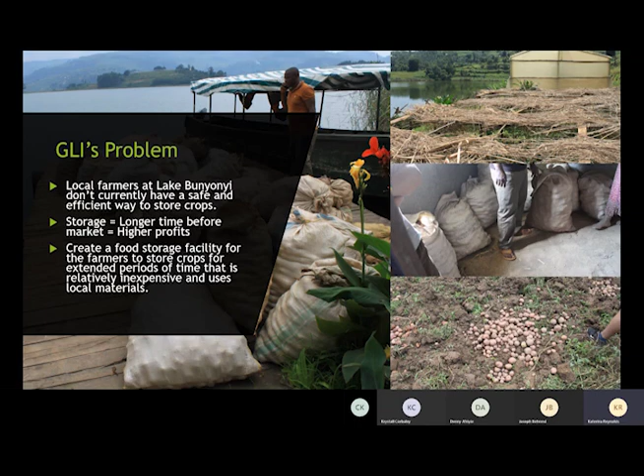So we were tasked with creating this food storage facility for the farmers to store these crops for extended periods of time that is relatively inexpensive and uses local materials and local labor. So this goes into our requirements, which is that we had to determine a certain storage capacity for the potatoes that we assumed would be stored. And this value would increase year by year due to the farmer increase.

Then it would only use locally sourced materials due to the cost, as well as making the food storage facility cost effective for any farmer to build on their own. The building of the facility itself would include local labor, whether that's the farmers or local construction, and it would have some sort of environmental control to allow for the produce to have a longer shelf life. Finally, it would have some low to no energy lighting for the farmers to see where their crops are being stored.

Earlier this year, we had the opportunity to visit Uganda to interact with the farmers and the customer to really understand the problem at hand. Before we got there, we had a design in mind, and after interacting with the farmers, the biggest change that we made first was the location. Initially, we thought the model farm was going to be on the resort. But after interacting with the farmers, we realized that we really needed to change the location to the model farm where the farmers can go there at any time and really pick which technology or design they would like to implement on their farm.

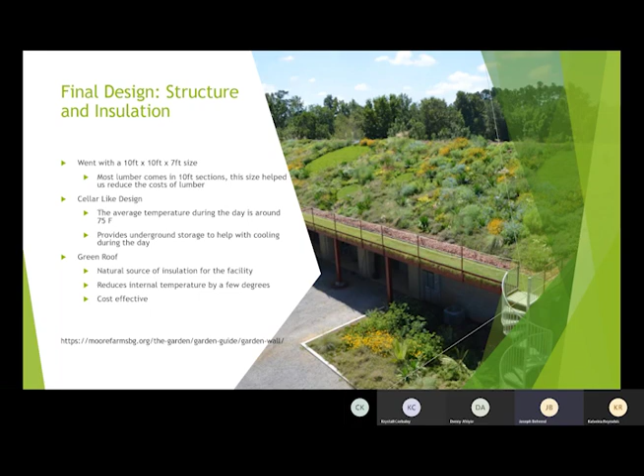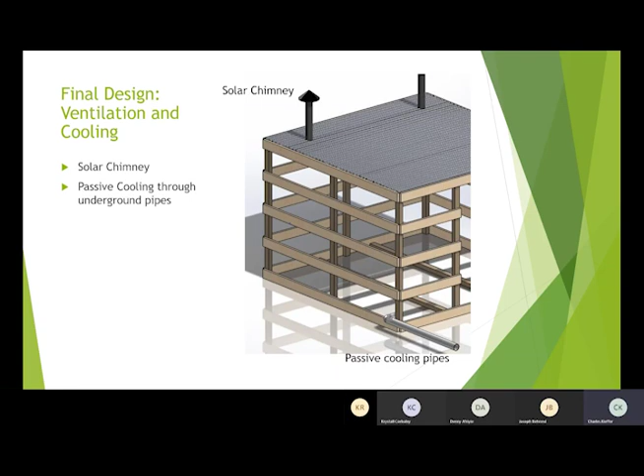For our senior design project, we were tasked to design this crop storage facility, so we did not have an actual product. So to prove that our design worked, we did various calculations to ensure that it was structurally sound and that all concepts achieved our engineering requirements. Solar chimney calculations were done to ensure that the solar chimneys that would be installed would be large enough to ventilate all the air out of the storage facility in an adequate time.

Beam load calculations were done on the roof of the storage facility to ensure that additional weight from rain or even a person standing on the green roof would not break the storage facility. Surcharge loads were performed to determine whether the wood could withstand the surcharge loads from the soil in the area and whether land shifts would apply too great of loads onto the structure.

And then we investigated various anchoring situations with cellar designs, and we determined that it was not necessary to anchor our design.

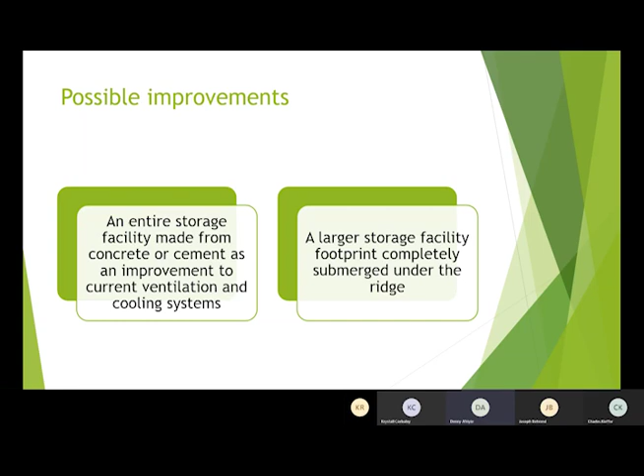Also, currently, we designed the facility to accommodate a prediction of how much the farmers can harvest in the next couple of years. We see an opportunity for enlarging the current footprint of the storage facility underground, since there's a lot of space, and this will allow the farmers to store even more crops.

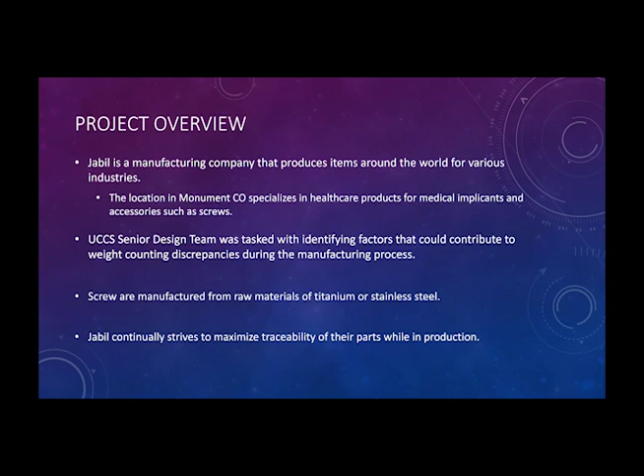The project is for Jabil, which is a manufacturing company around the world. Specifically, this location is in Monument, Colorado, which specializes in medical screws. Our job was to identify factors that could be contributing to weight counting discrepancies. When screws are manufactured, they are then weighed on scales, and the scales produce a count, which enables Jabil to determine the amount of screws in a specific lot size.

As these screws come off the machine, they are weighed at various steps throughout the process. Occasionally, the count will be off from a previous step, requiring a 100% verification process. This process is extremely time consuming and costly. A lot of times it ends up in scrapping the entire lot, when they have lots with 50 to 1,000 screws and the price of a screw varying with roughly an average of $50 a screw, it can be extremely costly.

Through initial investigations, we toured the site multiple times. We also conducted interviews with both stakeholders and various employees on the floor, and we noticed a couple of different things. The first one being that the scale setup and the stand configurations varied at each weight station. So even though a screw went through multiple stations, it saw various scales and various configurations.

The other thing that we noticed was that the process itself is left to operators' discretion and varies between operators. With those factors and others observed, we decided that an eight-factor DOE would be the best way to explore the weight counting discrepancies that we saw in the facility.

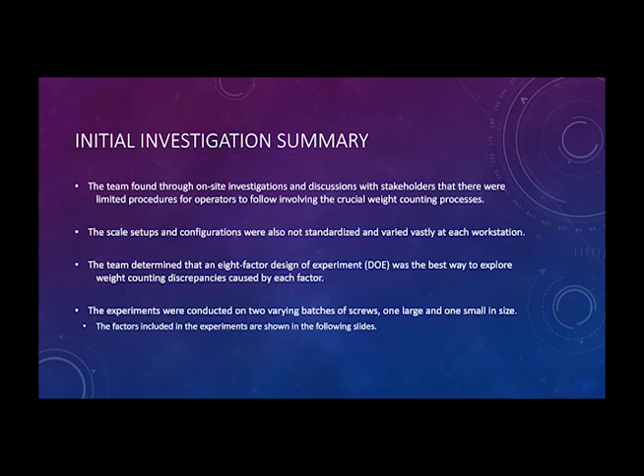The first two that we want to talk about are the scale capacity and the initial count setup. So initially, we noticed that there were 12 kilogram, 5 kilogram, and 2 kilogram scales located throughout the facility. We decided for this specific project to only focus on the 12 and 5 kilogram scales, because the 2 kilogram scales were mainly only located over in the shipping area and weren't used on the floor. We also decided to look at the initial count setup. So some operators initially put 10 parts on the scale when establishing the count, whereas other operators put 25.

The third factor the team decided to investigate was part condition. The team noticed through their on-site investigations that as the screws come off of the machines, they have oil and burrs, and the team determined that this must add to the weight discrepancies seen by the final results on the scales. So the team will examine the magnitude of error produced from the oil and burrs remaining on each part.

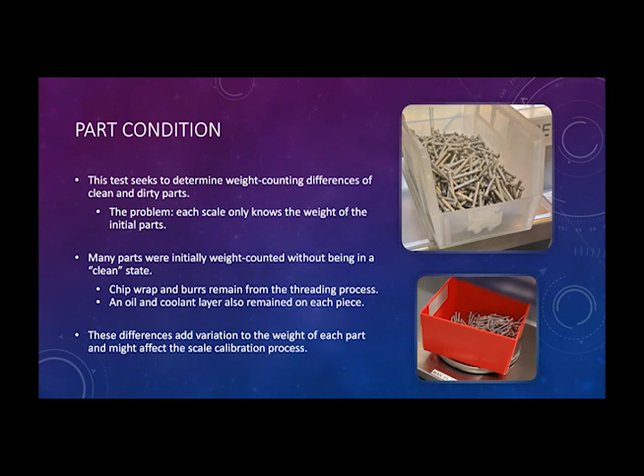Another factor investigated was scale configuration. As the team witnessed multiple weight counts being performed, they noticed that some of the scales were out of tolerance, meaning they were unbalanced. The team recognized that this could potentially cause weight counting discrepancies seen on a day-to-day basis, so they decided to include this factor in their DOE to see the magnitude of error produced from scale tolerances.

Enclosure and stand type were two more factors that affected the weight count. As the team walked through the Jabil plant, we found different enclosures. In some cases, there was no enclosure. In other cases, there was half a door, and in one instance, there was a cloth. We determined that airflow would affect the weight count as the plant has multiple fans that produce airflow, especially during the summer.

The team noticed that the deburring machine produced a large number of vibrations right next to one of the scales being used, which could affect the weight count due to the scale sensitivity. A number of stands had isolation blocks attached, while some stands had wheels attached and a few only had a piece of cardboard attached to the bottom, which we figured would affect the weight count as only the isolation blocks reduce the impact of vibrations. We estimated early on that a full door with hinges would reduce the effects of airflow the most.

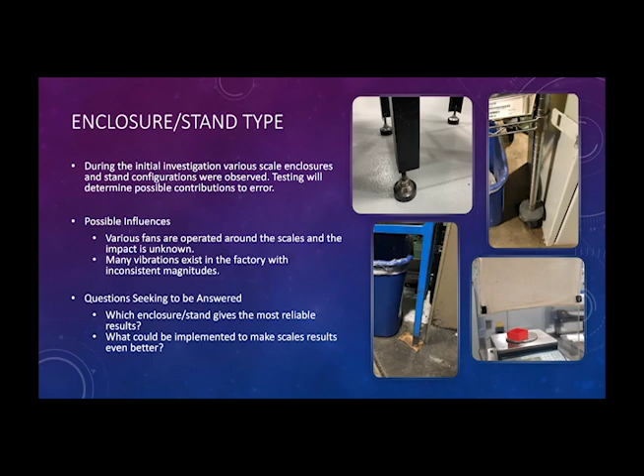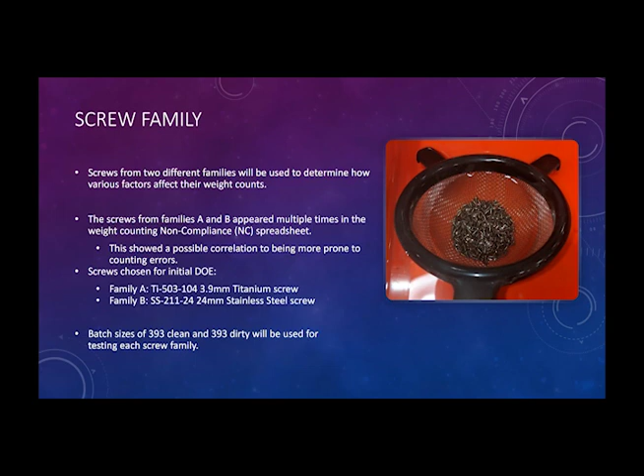The team received an NC report from Jabil detailing exactly which screws were resulting in a weight counting error, and we found that the following screws appeared a number of times. From family A, the titanium 503104 3.9 millimeter screw. From family B, the 21124 24 millimeter stainless steel screw. Batch sizes of 393 screws statistically covered the range of screws which are counted at Jabil.

In order to test the impact that the previous 8 factors had on the weight counting accuracy at Jabil, an online software called Minitab was utilized to create a design of experiments, commonly referred to as a DOE. And through this DOE, we were able to test those factors and determine any correlations between the factors or any individual impacts that those factors had on the accuracy of weight counting.

From those results, we were able to obtain a couple very valuable results. The first one was that screw cleanliness, which was our factor D, was by far the largest factor contributing to error in final count.

This was a result of the small screws not being able to be accurately counted when coated in oil. This was also seen in regards to the large screws as well. The second result that we were able to determine was the initial count size, which we had called factor E. This had little to no correlation to count accuracy, which was very interesting and unique and went against what we originally hypothesized. It was determined that when performing the tests, the initial count size, whether it be 10 or 25 screws, both yielded similar results.

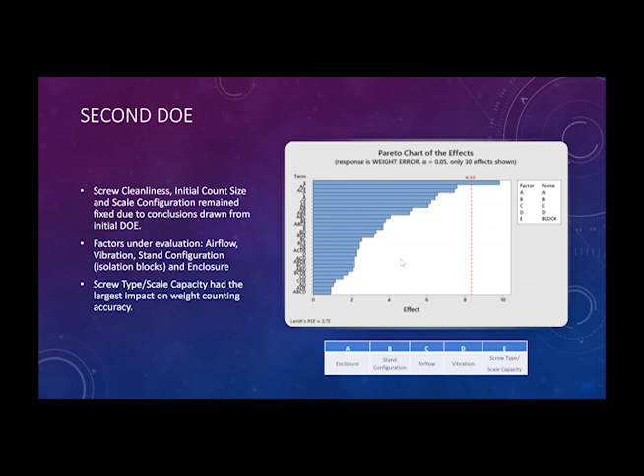So airflow, vibration, stand configuration, and enclosure were tested. From this testing, it was determined that screw type and scale capacity actually had the largest impact on weight counting accuracy. This just shows that we needed to test the screws on the appropriate scale. In order to also see more in depth some of the other effects that the factors had, the small and large sections of the DOE were broken out and analyzed independently. The most conclusions were able to be drawn from the small DOE, which the results are shown on the right half side of the screen.

It shows that airflow and enclosure, factor C and factor A respectively, had the largest impact on the accuracy of the weight counts for the small screws. When the screws were being tested and the airflow was placed directly on the scale, it experienced both high and low counts. As seen in the table, counts were experienced of 19 less than the actual number of screws in the lot, and 58 more than the actual count in the lot. This was due to the airflow and enclosure, as you can see in row 1 and the final row. In the enclosure, there was no door and high airflow in both the last row and the first row, which were both the highest difference away from the actual weight count that we were shooting for.

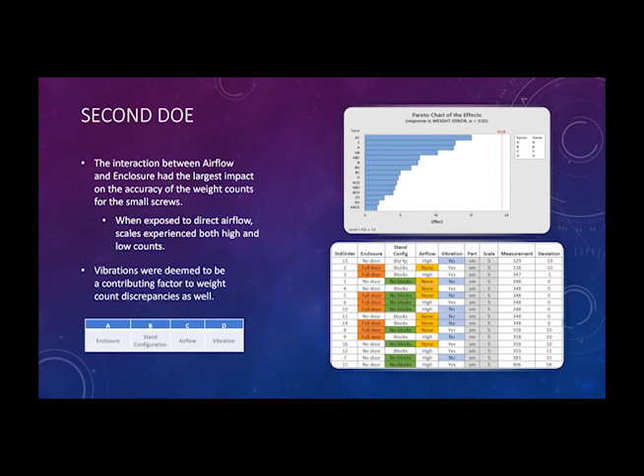It also was a result of vibrations, which you can see in the final row where there were no isolation blocks and high vibrations, which resulted in 58 extra screws being counted than what were actually supposed to be there. The biggest takeaway in our studies was the lack of a standard operating process through Jabil's weight counting procedure. A standard operating procedure needed to be in place, tailored to the screws being weighed. Smaller screws should be weighed clean with a low capacity, high resolution scale, and larger screws should be weighed clean with high capacity, low resolution scales.

Operator miscounts should be considered, and action should be taken to mitigate these. Some physical solutions could potentially be a trough that helps easily preload 10 screws for the initial count. Isolation blocks and full enclosures should be implemented on all weight stations to minimize the effects of airflow and vibration. And scales should be confirmed to be in tolerance before counting, as opposed to the 6-month calibrations that are currently performed.

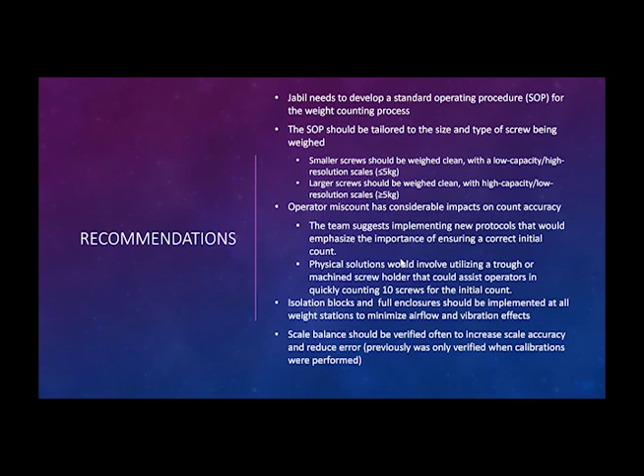My name is Kelly Castrita, and I'll introduce the sponsor as well as present some background information about our senior design project, LIU Steering Box. Linköping University, also known as LIU, reached out to UCCS as a sponsor for the project for the LIU Formula Student Team. The LIU team is made up of several members who work on various tasks to include electronics, vehicle dynamics, HR, and business engineering.

SAE not only hosts the various competitions previously mentioned, but they set the regulations for each division to ensure a fair competition. While these competitions are held around the globe, the LIU team can only participate in those around Europe. The primary focus and design for the Formula Division is to maximize downforce on the vehicle while being as lightweight as possible. This emphasis on being lightweight will feed into the problem presented. The next speaker of the presentation, Riley, will discuss this problem.

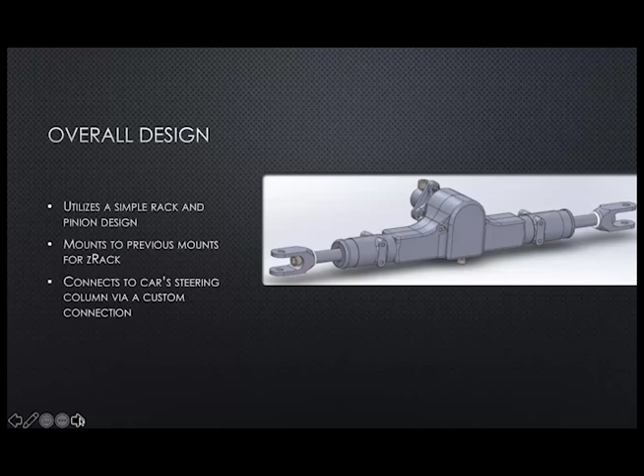Hi, my name is Kyle Jocelyn, and I'm going to be talking about the connection design. The main focus of this project was to design a new connection between the steering box and the steering wheel. It had to be quick and easy to separate from the chassis without cutting or breaking anything. 4 designs were evaluated. They were all compared based on weight, strength, longevity, cost, and manufacturability.

Each half of the connection has a face that aligns with the face on the other half. They are connected together using 3 bolts and 3 nylock nuts. We will be delivering LIU 2 different options for the half that connects to the steering column. They can choose whichever one they would prefer to use more. The first option is steel. This part can be welded to their steering column, which is their preferred connection method.

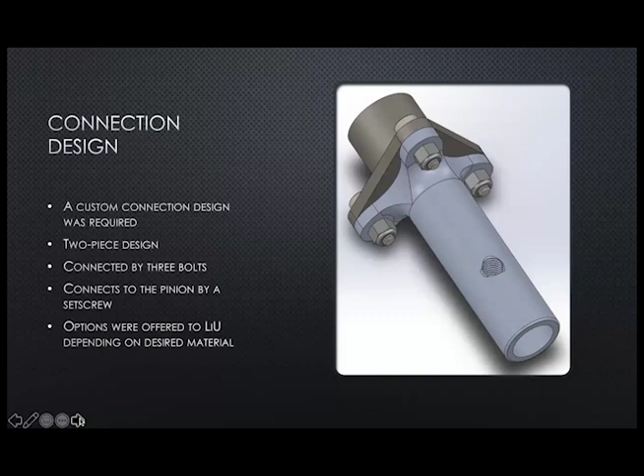The second option is to have an aluminum piece, which is about 10 grams lighter, but it will be expected to have a shorter lifespan. With this connection design, all the specifications requested by LIU have been met. Now I'm going to hand it over to Taylor to talk about the testing.

Hi, my name is Taylor Clifton, and I'll be going over some of our testing methods and why we chose to do so. Some of our main requirements included the following. First of all, the strength of the rack. It must have been able to withstand a 6,600 Newton axial load and also be able to withstand a cyclic loading of a maximum operational torque of 15 Newton meters. During our testing, we applied a 40 Newton meter force to include a factor of safety.

In order to meet the minimal play requirement, FSAE required that less than 6 degrees of motion occur before axial movement. LIU requested that we reduce this to 3 degrees of play. It also must be lightweight and weigh less than 430 grams and must also meet all FSAE requirements. For the strength requirements, we tested the parts in SolidWorks using a finite element analysis and cyclic loading features.

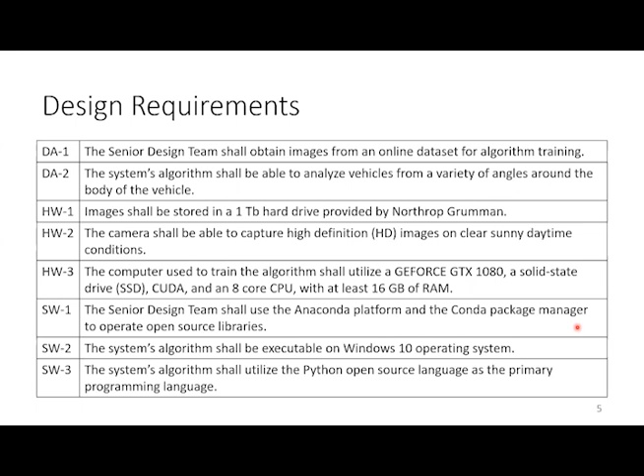Next slide. For the senior design requirements, based on the project requirements, the team developed 6 different categories for the requirements. They are DA, data acquisition; HW, hardware; SW, software; UI, user interface; A, algorithm; and T for test. The most important part is the DA. The system should identify the car from different angles around the body of the vehicle. To set a baseline hardware and software requirements for the algorithm to run, our team came up with HW1 to HW3 and SW1 to SW4. Next slide.

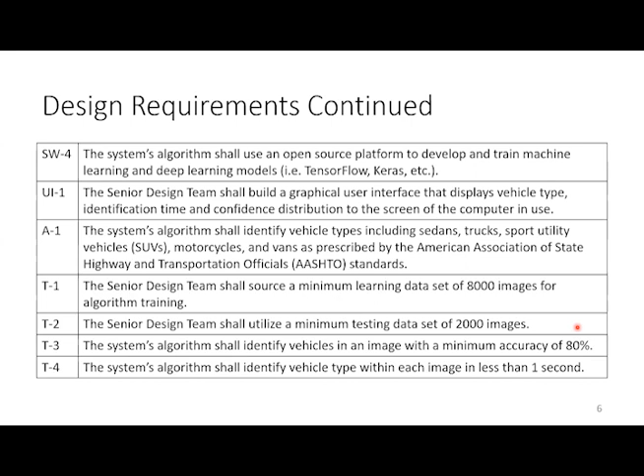UI, user interface 1, is based on the requirement from Northrop. So the senior design team should build the user interface to display the vehicle's type, the time to identify the car, and the confidence distribution on the user interface. Also for the algorithm, our system can identify sedan, truck, SUV, motorcycle, van, and bus. For testing, the most important part is our algorithm should identify vehicle type in less than 1 second, and the accuracy should be higher than 80%. Next slide.

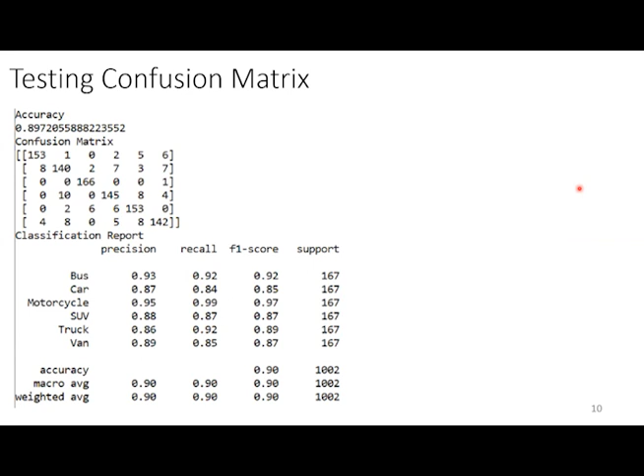We did have some project complications during this entire project. The first being the initial training and testing accuracy was less than 50%. This meant that we were not hitting our goal, and this was fixed by mixing all of our data sets, testing, validation, and the learning. And that was done to normalize the collected data set. Also, during that time, filters were changed, which changed the algorithm a little bit.

Then the vehicles were being misidentified when the algorithm was increased from 3 to 6. The prototype code started with just 3 vehicles, and then we pushed out to 6, which we were normally wanting to do as a requirement through Northrop. This was again fixed by normalizing the data sets. Another problem we ran into was the GUI was misidentifying outputs from the classification algorithm. And during all the fixing and prepping of the model, this let the GUI finally output the correct classification for the vehicles that were being identified.

Next slide. So in conclusion, the senior design team was assigned by Northrop Grumman to develop an algorithm capable of identifying 6 different classes of vehicles. The algorithm was able to obtain an average accuracy of 89% with an average identification time of less than 0.5 seconds. And we also developed a GUI for it. Next slide, please.

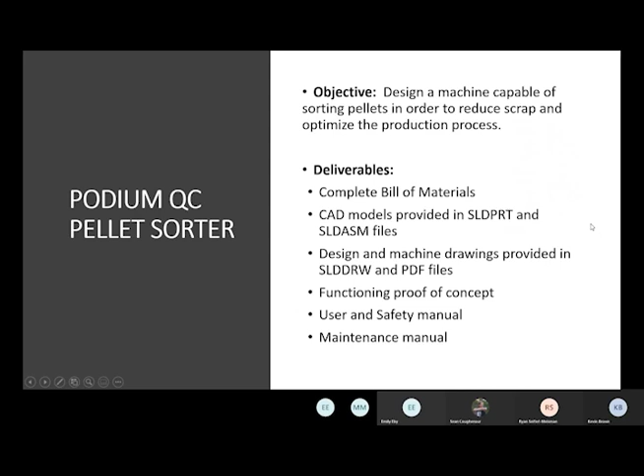and a maintenance manual. Currently, Podium controls the pellet masses to 50 milligrams as industry standard, using statistical analysis to control each batch. With this senior design project, we will hold the pellets to 5 milligrams, and a superior product line will be created using this automated process. The quality of the product depends on the weight of the pellet as well as the shape, but in this design, we use the weight of the pellet as the controlling factor, as a light or heavy pellet changes the shape.

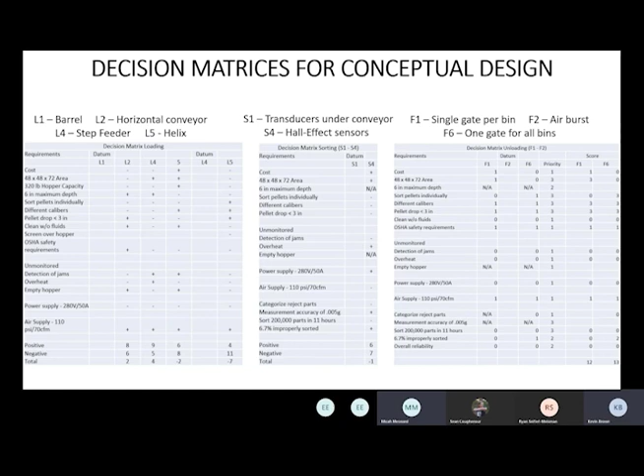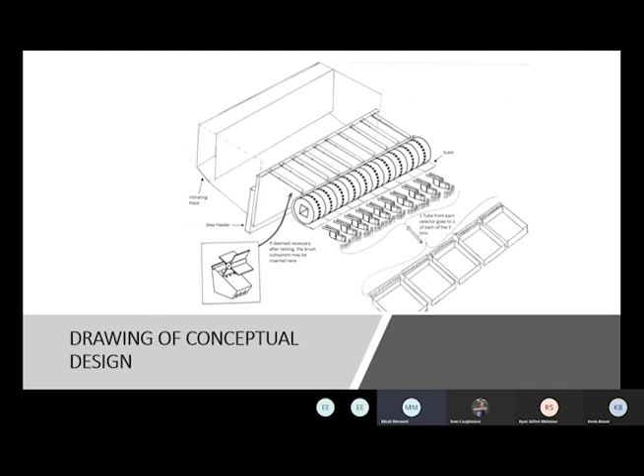pellet weight. After our conceptual design review, Podium decided to source a vibratory feeder, which changed our project requirements by eliminating the first part of our design and left us with from the cogwheel all the way on.

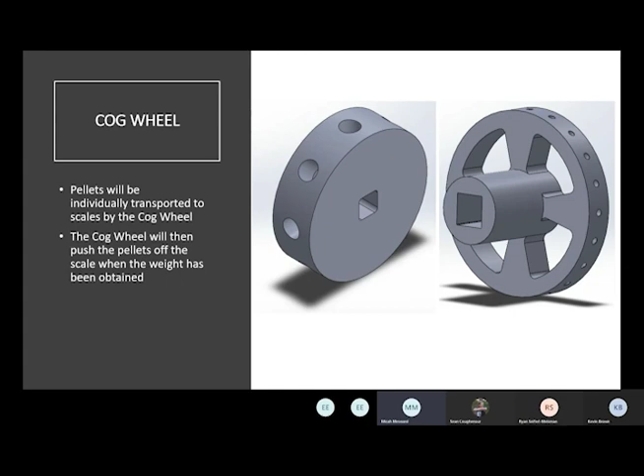In order to sort the pellets after it has been weighed, we needed a way to select a path to the appropriate bin. At first, we decided on servo-driven selectors that rotated horizontally, where the pellets would slide into tubes that would connect to the appropriate bin. However, once we began designing the system, we realized this would require 50 tube paths, which was unreasonable for the

design. Our solution for this issue ended up consisting of 5 large planes that are the output of all 10 selectors that rotate vertically instead of horizontally. We wanted to simplify the downstream path of the pellets as much as possible with this solution. Each plane connects to a single flexible tube that leads the pellets to the appropriate bin. This design allows for minimal risk of damage to the pellets while allowing for the fast sorting time required by the system.

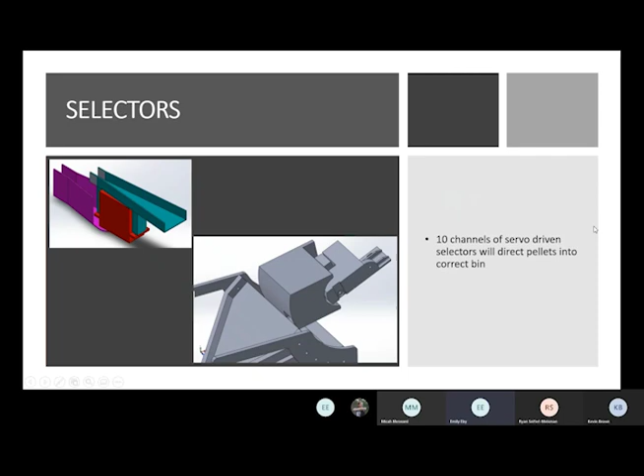The conceptual design cost approximation was based on our research of required components and manufacturing. We also estimated for miscellaneous materials to serve as wiggle room for the project as it developed. Our initial estimation was around 10,000, which was agreed upon by the project sponsor.

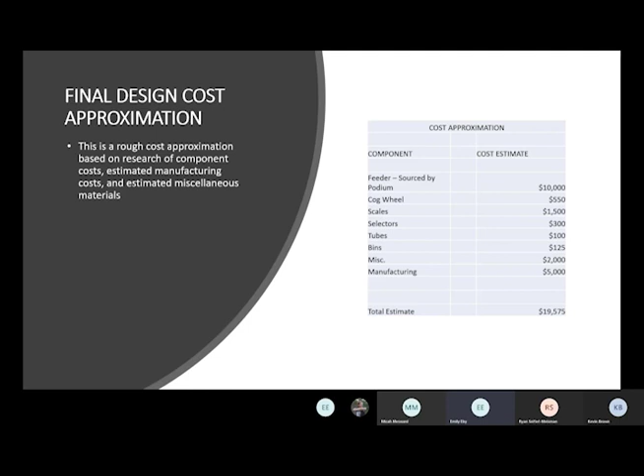Since we had some design changes between our concept and our final design, the cost estimation changed. The largest change was the feeding system of the pellets. Our project sponsor suggested outsourcing the system, which drastically increased our approximated cost. Due to the increased costs of the overall system, our sponsor recommended having the rest of the system cost be within a reasonable value. And he was relatively flexible with the overall cost. He said that as long as it didn't have the price tag of a Ferrari, he would be happy.

All model creation was performed in SOLIDWORKS CAD software. A test model was designed, 3D printed, and built, and a one-channel proof of concept was also modeled, 3D printed, and built. Both of these were used to test certain functions and validate the overall concept. Some of those functions include servo functionality, coding validation, fit of pellets in the cogwheel, and angles of the selectors

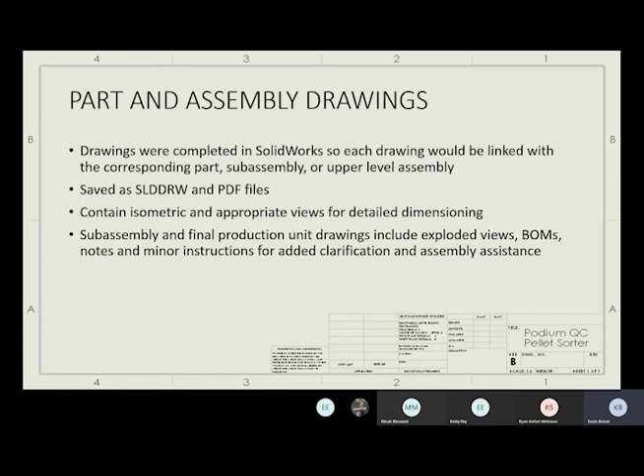and transport trays. All files were provided to Podium in the appropriate file formats of part, assembly, and drawing formats from SOLIDWORKS, as well as PDFs for the drawings, and STL files were also provided for anything that needed to be 3D printed. Any part requiring machining has drawings with detailed dimensions so that they can be correctly manufactured. All subassembly drawings, as well as the final unit drawing, have exploded views with bill of materials and balloons. And notes were also added to simplify the assembly process for Blake at Podium.

The main three mechanical parts of the system that we used this for validation were the cogwheel feeding and motion, the selector motion and angles, and the transport system consistency. Through the course of these tests, we came out with a resulting 99.33% confidence in the design.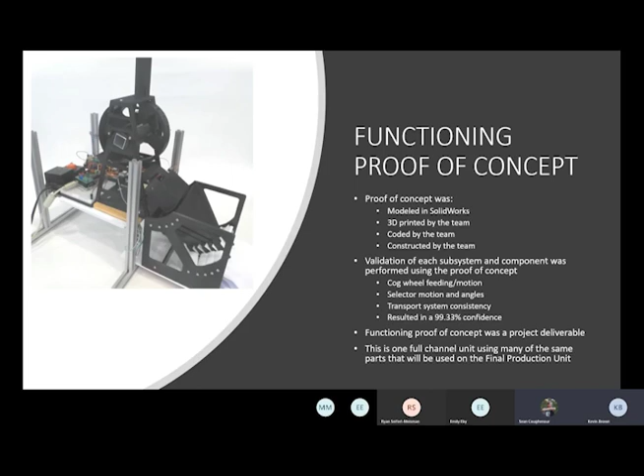It also resulted in a pellet per hour rate of 2,351, which resulted in us being able to sort 211,590 pellets in 9 hours, which exceeded our requirement of needing to be able to sort 200,000 pellets a day. Through the course of this testing, we also discovered an issue with the load cell we were using to weigh the pellets.

So as we were testing, we came to the unfortunate realization that the load cells we had been using and working with would not provide the accuracy that we needed. The unfortunate part about this was that we found out 2 weeks from the end of the project. As a result, we did not have much time to work with to find a solution.

So after a couple of emergency meetings, we came to a suggested course of action, which Podium agreed to very graciously, where scales will be used in the future to provide the accuracy needed. However, due to the time, we will not be integrating them into the system. The technology, though, underlying the laboratory scales as opposed to load cells is fairly similar, so the integration of the scales into the rest of the system will be relatively simple.

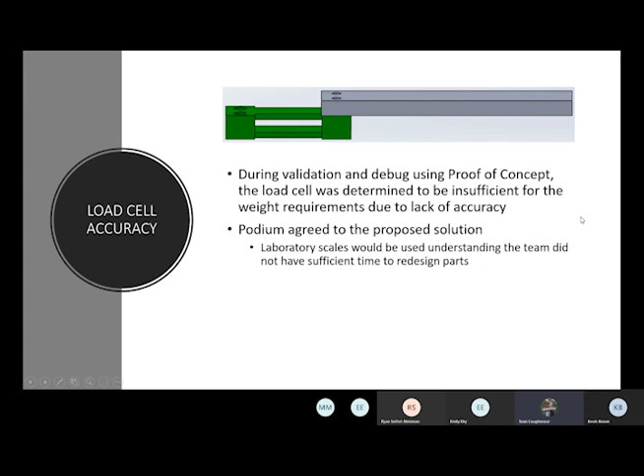So for the coding, since we were using an Arduino to run the whole machine, we logically used the Arduino IDE to program it, which is very similar to C, which has a lot of similarities to MATLAB. It allowed several of our team members to be able to program pretty quickly without having to learn too much. To run the system properly, we also needed a few third-party libraries integrated into the code so that we could properly control the servos and get readings from the scales.

In the code, there were three main sections in the structure. The first section was a declaration of global variables and parameters, as well as the inclusion of those third-party libraries. The second section was the setup of the communication from the Arduino to the sensors, the actuators, as well as the computer for displaying results. And the final section was the execution portion, really the heartbeat of the code, giving all the commands, reading the sensors, and performing logical checks to see if jams had occurred from sensor readings.

So after the final meeting with Blake, it was determined that this is still a successful outcome for the project, as the proof of concept still shows that the code and mechanical design can be used to sort the pellets in order to reduce the scrap and optimize the production process, as long as the load cell was switched out for a scale.

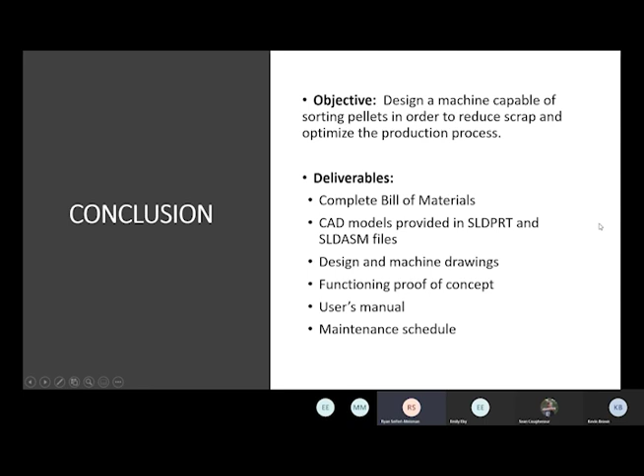Hello, my name is Paul Park. I'm the lead for the senior design project. The focus of this project was a rotating detonation engine. The team consists of Long Tran, Noble Kilman, Carl Rees, Marshall Hoyt, and I. The sponsor for the project was Dr. Matt Quinlan.

The rotating detonation engine is a device that utilizes a detonation within the annulus ring to ignite fuel and generate thrust. The detonation produces high thrust for low fuel usage, making it efficient compared to other rocket engines. All RDEs are currently in the testing and prototyping phase and are not currently in use.

The problems that come from an RDE, the rotating detonation engine, are incomplete fuel mixing within the engine, viscous forces in the annulus ring, and shock reflections that go opposite to the direction of flow. These problems pose a serious issue to the effectiveness of the design, and solving these problems is what will make the rotating detonation engine a viable engine.

To solve a lot of these problems with the RDE, we focused our project on the knowledge generation around RDEs, the fuel mixtures, design choices made throughout other research, and anything that impacts the ineffectiveness of current RDEs. The things that we want to maximize are the design of a detonation tube, which would act as an igniter to the rotating detonation engine by creating a shock wave with accelerated flames.

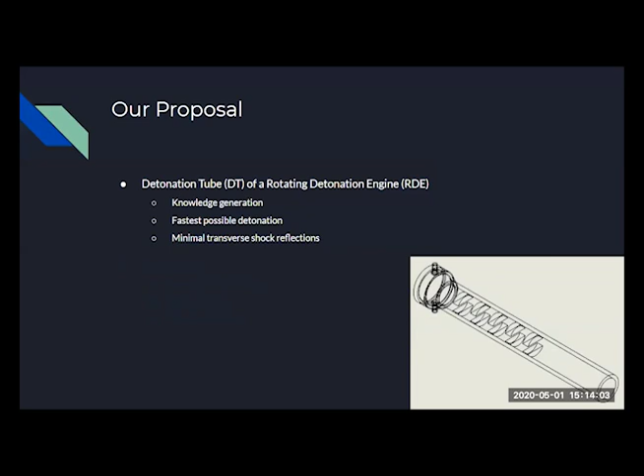As we moved through the course of our design, we had to adhere to certain requirements. It had to be able to actually transition a deflagration to a detonation wave, e.g. turn a rapid burn into an explosive combustion wave. While we'll momentarily discuss how we got to these design elements, over the course of our project, we finalized the following parameters within our detonation tube design.

So starting off with our probably most important parameter, the fuel and oxidizer, we chose H2 and air at a 29.6% fuel concentration level. This gave us an estimated detonation cell size of 12 millimeters. Moving on, we have a material that we chose of 304-316 grade stainless steel. This was for the primary casing and the blockages within the design.

Next, to ensure deflagration and detonation was achieved, we installed top and bottom obstacles within the tube. This also allowed for potential for staggered or symmetrical. Going over the most important dimensions, the tube, including the mixing chamber, was 268 millimeters long. 240 of those were the detonation tube, and the inner diameter was 24 millimeters.

The obstacle spacing within would be at a range of 1 to 2.5 times the diameter, and a blockage ratio of 0.4 to 0.6. Other dimensions can be seen in the model below, and are also included in the report. Additionally, we had designed the fuel and oxidizer inlets, the mixing chamber size and shape, the spark plug ignition, and general geometry based on the existing research and testing documents available, and the consultation of machinists and the feasibility and manufacturability.

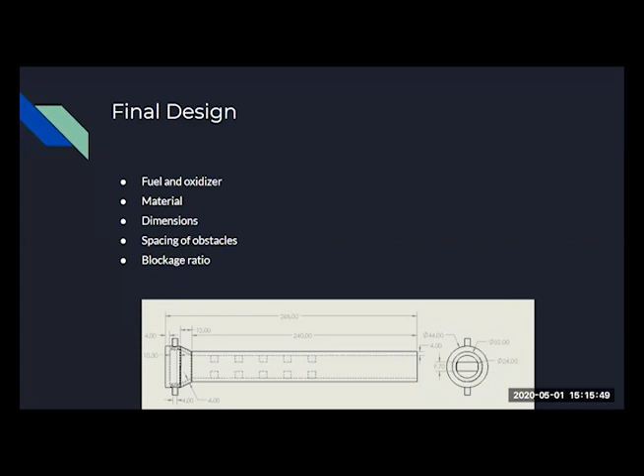To begin the process of finalizing the detonation tube, several research topics were distributed across the team. The fuel and oxidizer, material, deflagration to detonation transition, and dimensions were key points of research and design. Detonation cell size, a phenomenon vitally important to detonation tube design, is physically represented in these kinds of tubes by the diamond-shaped scorch mark pattern that's observable on the interior after a detonation wave has moved through it. This is integral for a proper detonation to occur.

We had to balance the reactivity of these possibilities with detonation cell size effect on detonation tube size itself, avoiding combinations too dangerous like H2 and O2, and combinations with too large of a detonation cell size like methane and air. Ultimately, we landed on H2 and air at stoichiometric levels, approximately 29.6% fuel concentration, which thusly allowed us to move forward with the rest of our design.

For the material chosen, we landed on using grade 304 or 316 stainless steel. Originally, we considered other materials like superalloys due to their being common in other aerospace structures. They have excellent heat resistance, but were often expensive. It was also determined that it would be unnecessary because the detonation tube would only be under this extreme temperature for a split second. So this allowed us to just use a low-grade steel. It would be sufficient in handling the temperature for the short duration, as well as allowing for better machinability.

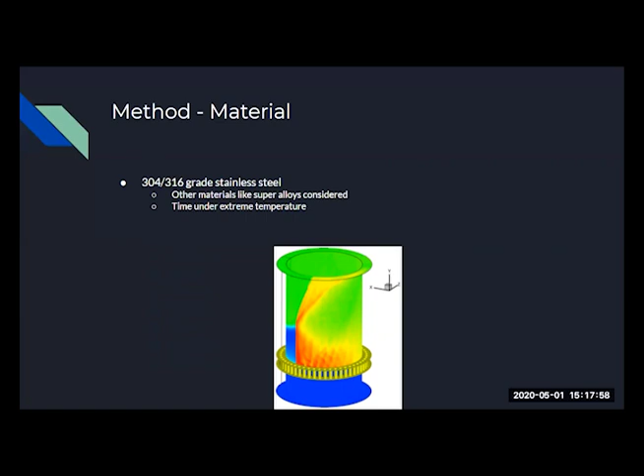So the method to ignite a rotating detonation rocket engine by use of shockwave is called a deflagration to detonation transition. A small spark at the end of our tube will propagate through these obstacles, and shock waves and large pressure spikes within the obstacles will induce flame wave acceleration and create the detonation used to ignite the RDE.

We considered a variety of different obstacle designs based both on research and idea generation throughout the team. And it was pretty easy to realize that simplifying the design is the most important part. This makes the machinability of the part much more achievable. We considered different ways that you would have to bore out solid tubes or fill in slotted sections of hollow tubes. Because of the limitations in resources for the team, focused on machinability, a simple design is desired for our detonation tube.

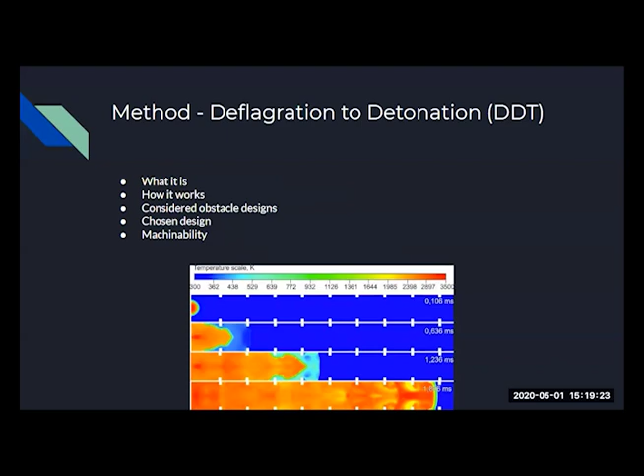So the diameter of the tube was designed to be 24 millimeters based on the detonation cell size of the fuel and oxidizer chosen. From there, the next focal point were the obstacles that had to be installed in the detonation tube. The obstacles implemented in the design served the purpose of inducing flame acceleration and allowed the detonation to occur much faster in the tube. In order to do so, the optimal blockage ratios were researched, considered, and calculated. The blockage ratios that were examined ranged between 40 to 60% of the cross-sectional area of the detonation tube.

The amount of space was an important factor to consider because it was needed to have shock reflection in order to accelerate the flame. Smaller blockage ratios did not induce enough flame acceleration, and larger blockage ratios inhibited the detonation from occurring properly since it prevented the detonation from traveling from the detonation tube.

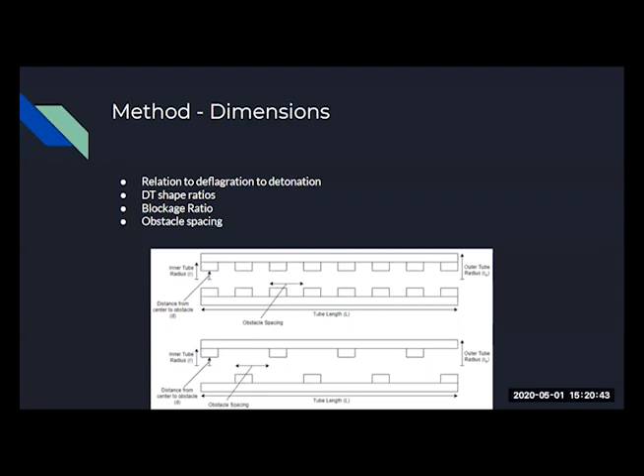After that, the distance between the obstacles had to be decided. Based on similar experiments, the optimal spacing was set to be 1 diameter apart, meaning they were 24 millimeters apart, or 2.5 diameters apart. Similar experiments indicated that this range allows for proper flame acceleration.

So as Sean mentioned before, we had 3 variables that we wanted further information on because we're in these ranges and we wanted the most optimal detonation tube. And again, those 3 variables were blockage ratio, obstacle spacing, and our inner geometry. To do this, the team took on computational modeling. We wanted simulation software capable of combustion modeling so we could determine these 3 variables.

We landed on a program called OpenFOAM, which is an open source CFD toolbox. And it had the capabilities to allow for developers to customize their own numerical solvers. This was really the key for us. These numerical solvers included combustion solvers and were what we were going to take on to get our variables.

So the team designed variations of the detonation tube with a CAD model, changing the respective values such as blockage ratios and obstacle spacing, as Kyle mentioned before. But the important factor is that we saved everything as STL files under ASCII format because those were compatible with OpenFOAM and the program systems. So values such as velocity, pressure, and temperature could be seen at different time instances. ParaView was an extension of the program to visualize the simulations on the design models made by the team.

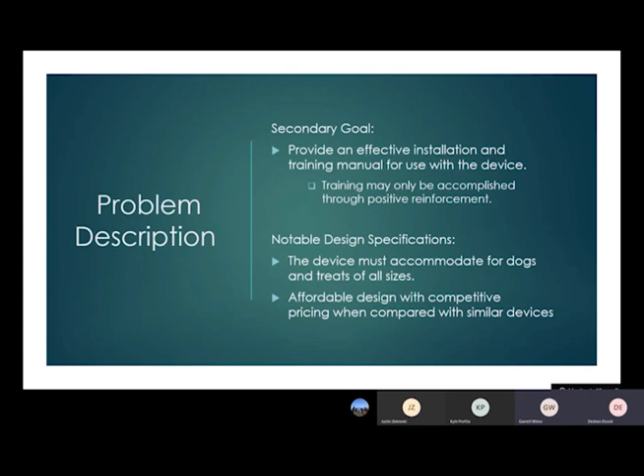Following the problem description, we had a few interviews with dog owners and dog trainers regarding what kind of things they would like the product to accomplish. So based on that, we had a bunch of brainstorming sessions, and we came up with our initial design. So for that, we came up with a rectangular exterior holding a clear plastic treat storage device. We would use a motor to rotate the gear, and that would rotate the sphere. So we used a mechanical support, which is a motor for rotating the gear.

Okay, give me just a second. Oh, you're good. Okay. Can I continue now? Yeah, go for it. Okay.

So we used a motor that would rotate the sphere, and hence it would be dispensing treats into the detachable plastic tray. We would use keyhole screws to connect the device to the wall, and the device would be powered by a wall socket, and the device would communicate to the doorbell through the wireless Bluetooth connection.

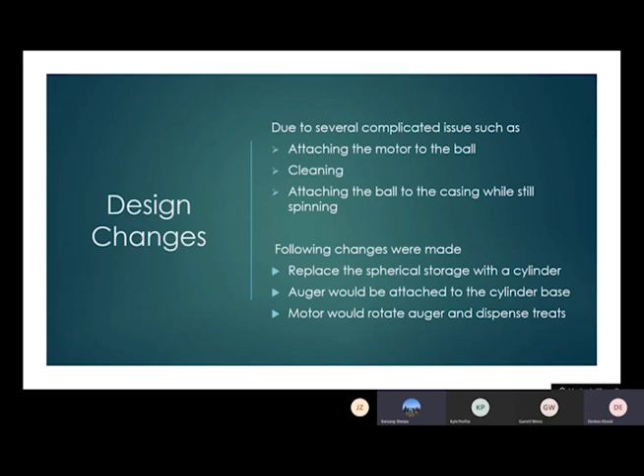So during the final stages, we were having some issues with our design because the spherical ball was having some issues. It was hard to attach it to the casing while still rotating. It was difficult to clean, and so we had to make a few changes to the device. The changes were we would replace the spherical ball with a cylindrical device, and we would attach an auger to the base of the cylinder that would rotate with the help of a motor and hence dispense treats.

The auger can be removed and put in the dishwasher, as well as this treat storage element, the tube, can also be put in the dishwasher. The tray can be sprayed with disinfectant and wiped clean. The device is pet safe due to the fact there's no pinch points. The auger is covered so the dog's nose does not get pinched, and it's height adjustable so that it can accommodate for different sized dogs by simply putting screws into the wall and hanging the device from those screws.

The next component was the electrical side of the final design. A lot of work had to go into the electrical as we had to interface with both a doorbell operating system and the device itself wirelessly. And that involved taking AC and rectifying it down to DC power, and also reducing that voltage in the device so that the Arduino development platform could sense when the doorbell is ringing and also be powered by it.

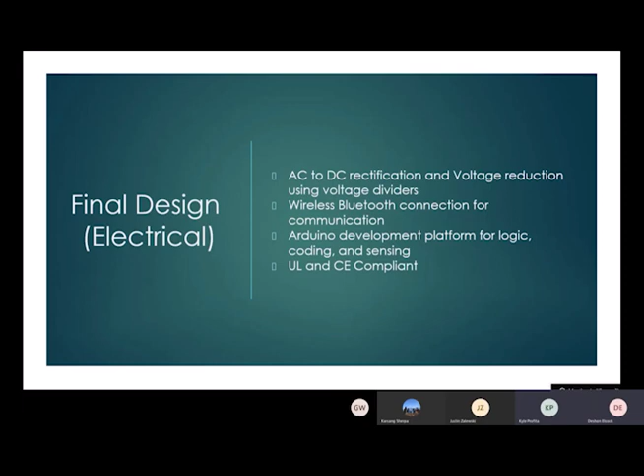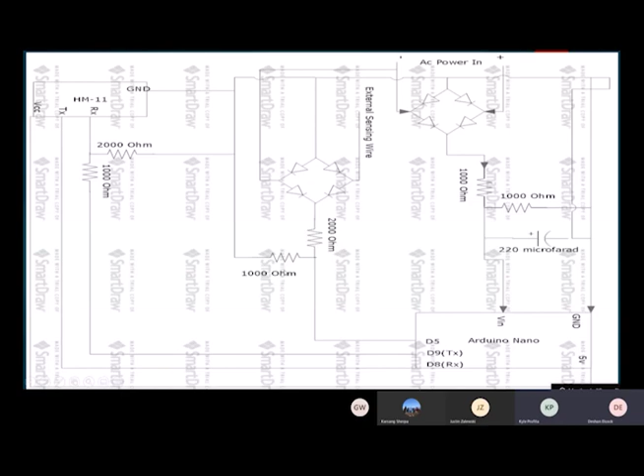So to make sure our device solved the problem that our sponsor gave us, we did some tests. The first test was a Bluetooth test. So we tested in a 2,400 square foot home with an unfinished basement. It is 3 floors, and we tested from one corner to the other, and we didn't get any drop in connection.

For our finite element analysis, to simulate how the device would be operating, we put a 5-pound force on the tray to simulate the dog grabbing for a treat with its nose, a 2-pound weight on the funnel to simulate 2 bags of treats being pushed on it, fixed locations at the keyhole screws because that's where the device is going to be attached. The backing had a roller slider.

We had cylindrical beams to simulate the screws that attach the top and the bottom of the device. We found out that the factor of safety was 20, which is really good. So we know that it's not going to fall apart. For the motor, we simulated a point mass 2.5 inches away from the base of the motor. We found out that the motor could spin the device with a factor of safety of 2.

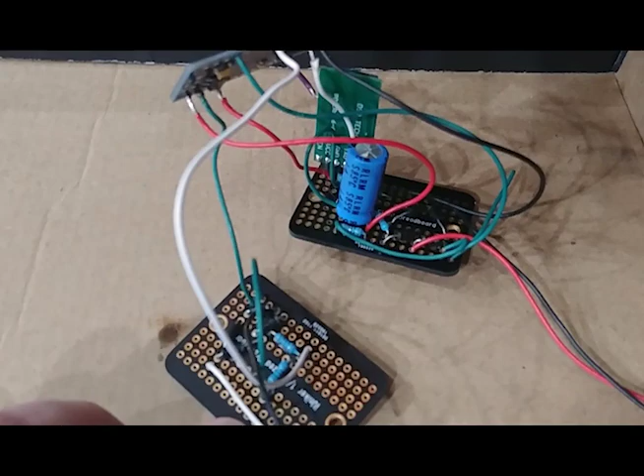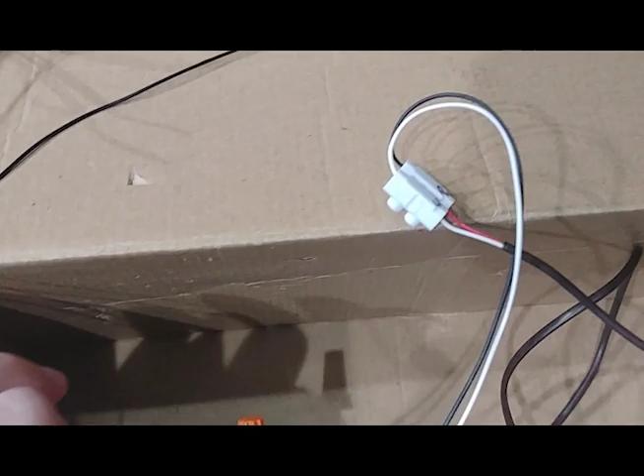Guys, I just wanted to give you an actual physical rundown of the physical prototype we made and show you it all working together with a mocked up doorbell system and everything. So if you look here, this is our makeshift secondary module board. This is what hooks up to your doorbell system with this black and white wire that hooks up to the end of this makeshift doorbell system here, which is run by this 20 or 16 volt transformer and this doorbell button on the front of the box.

This all runs into this Arduino here and this Bluetooth module hooked up on the secondary board. And this Bluetooth module speaks to this Arduino and Bluetooth module inside the base of our treat dispensing device. This is just a mocked up motor due to the circumstances we're all in. I couldn't get a full-size NEMA 17 motor working, so this is just a makeshift motor and motor driver down there just to show this all working together.

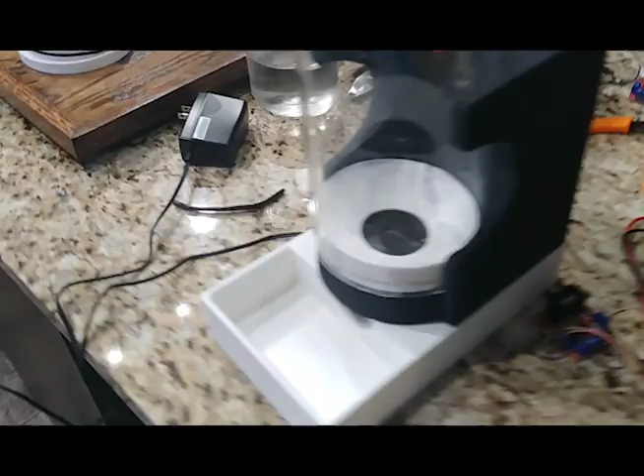And this is all powered via a 12 volt power plug that comes out of the back of the device here. And I'm gonna go ahead, throw this all back together so I can show you a quick example of the whole device working. Back, this is the completely put together device. I've got it plugged in to our 12 volt power supply in the back. We're gonna throw some Cheerios, aka fake dog treats, into the device there.

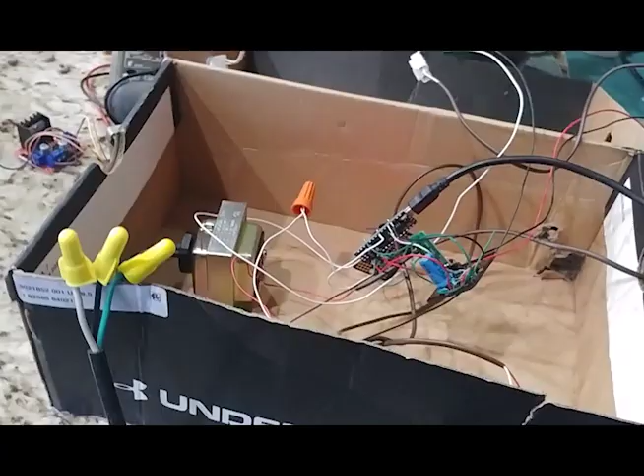Then we're gonna come on over here to our doorbell. You can see that everything's powered up and working here. We're gonna go ahead and give the doorbell a push. We're gonna give it a couple seconds to transmit the signal, and you can see it starting to spin. Now we got some dog treats, not quite ready to come out yet. That's just because we just filled the device, but you get the gist of it. And I think that is a great example of our doorbell dog treat trainer.

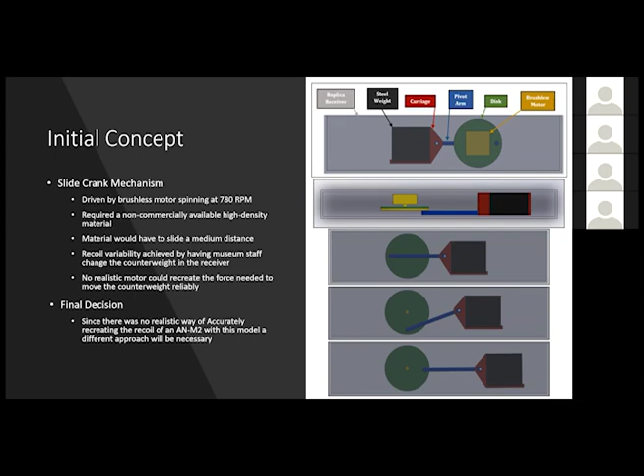For our initial concept, we looked into creating a slide crank system driven by a motor that pushed a counterweight. After some research and development, the team found that there were no available counterweights that were the size and weight that we needed. Also, during the research stage, we found that the force-speed ratio needed for the motor was unachievable due to the weight that the motor needed to push. Because of these constraints, the team came to a consensus that we needed a different design to recreate the recoil system for our replica. Next slide.

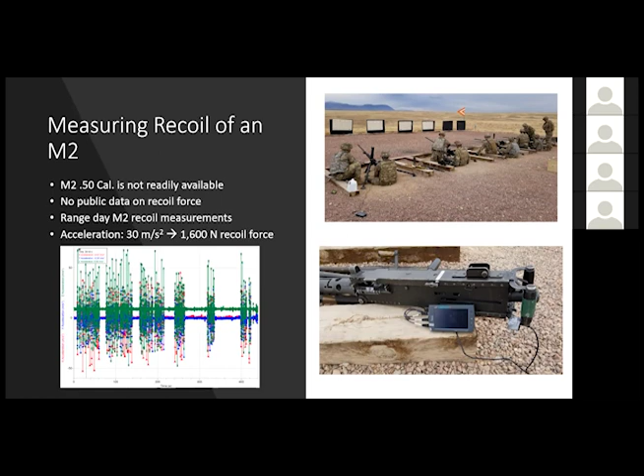Using the conservation of momentum was sound, but we had no actual data to support the recoil force of the M2. So we reached out to Fort Carson, and 2-77 Field Artillery generously hosted us and allowed us to come out to their range and record the mass of the machine gun and all equipment associated with firing, such as tripod, ammunition. We then hooked an accelerometer up to the machine gun and recorded data. Next slide.

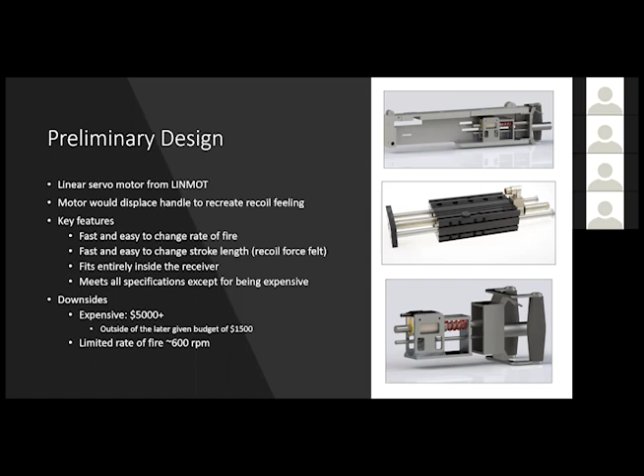For the critical design, the presented design was to have a rotary servo motor which drove a gear train that connected the linkage to the handle. This setup can be seen in the CAD model at the top right. The critical design utilized a low torque motor, which is the reason we were required to use a gear train. The gear train allowed us to take excess speed from the motor and transition it into additional torque to meet the required torque to move the handle.

For this iteration, neither the linkage at the gear connection or the handle connection had a rod end to mitigate any misalignment. On the gear, you can see that the variable recoil slots have very little variation from the middle to the outside. This limited our variability, and we were only able to get down to about 76% of full force.

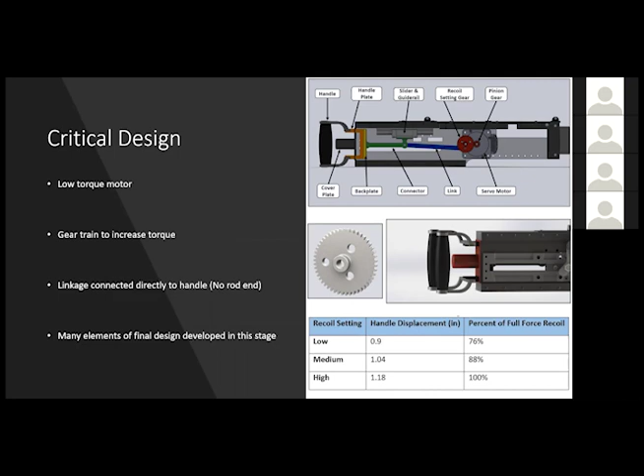If we go on to the part breakdown, the motor is housed outside the gun, but within the ammo can, not shown here. It then connects to the recoil disc. This recoil disc has a slot, and the distance upon the slot changes the amount of recoil the user feels from 0 to 100%. Connected to that is the rod end linkage. This linkage is able to pivot in all degrees.

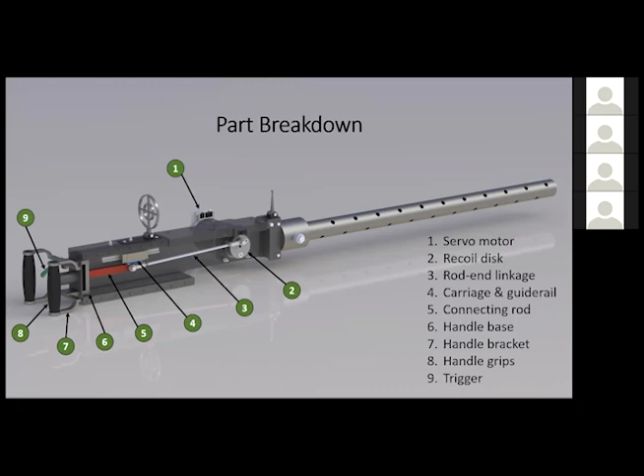Attached to the linkage is the slider and carriage. The slider and carriage provide all the alignment and structural support needed. A connecting rod then connects the slider carriage assembly to the handle assembly. And next slide.

So in the top left, we can see a top-down view of the linkage assembly. It is meant to be aligned. However, due to the manufacturing and installation, alignment may not be perfected. However, this is mitigated and counteracted by the pivoting capability of this rod end linkage. On the top right, these are the three parts consisting of the connecting rod. These are meant to be easily manufactured in a machine shop and welded together.

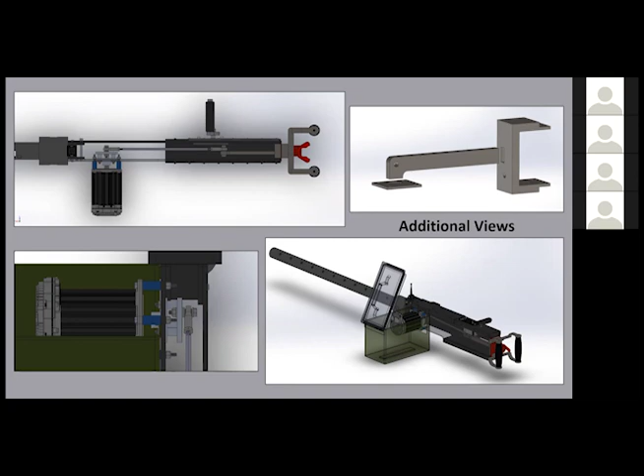On the bottom left, the motor needs to sit on standoffs. This is to allow space to have the tools required to loosen the fastener and adjust the recoil on the recoil disc. And then finally on the bottom right, we can see the entire assembly with the motor housed within the ammo can. Next slide.

The requirements for the museum were all met, and the museum was highly satisfied with the progress made during this design phase. Thank you for watching.

Hi, I'm Ryan Janitel. The National Museum of World War II Aviation has partnered with the University of Colorado, Colorado Springs, to allow seniors in the Mechanical Engineering Department a chance to work on solutions for real-world problems. The museum and its representative, Vern Patterson, want to create an interactive display simulating being a gunner on a B-25 Mitchell during a World War II bombing mission.

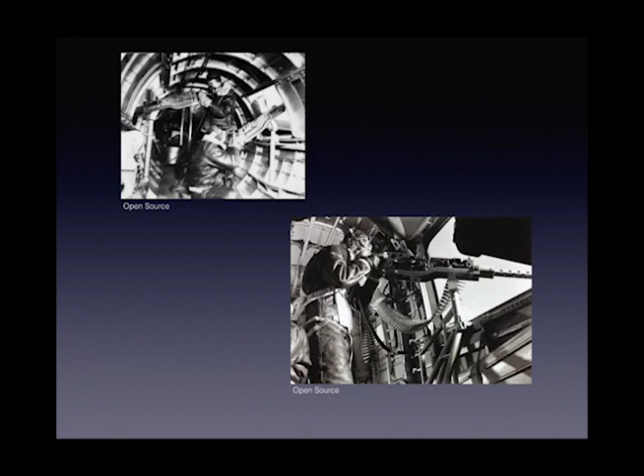Hi, I'm Jason Wade. I will be talking about calculating the recoil forces that the replica may experience while providing realistic sensations, providing a workable budget for both labor and materials, and creating a safety matrix to identify and rate hazards associated with the eventual working replica.

Since this will be a dynamic model that is expected to simulate realistic recoil forces, those forces must be calculated. The forces are divided into two parts: the force experienced by the bolt as it moves within the receiver of the replica, and the recoil forces that the operator will feel as part of the simulation. The forces can be calculated by balancing energy and momentum.

First, the mass of the bolt inside the receiver must be measured or approximated. Since the genuine M2 bolt was not available, the dimensions of the bolt were researched, and then mass was calculated using the density of steel. Using a volume of 60 cubic inches and the density of steel at 494 pounds per cubic foot, the mass of the bolt was determined to be approximately 0.533 slugs.

Once the mass of the bolt was calculated, the recoil spring force needs to be estimated. It takes approximately 50 pounds of force to compress the recoil spring in about 8 inches. This results in a spring constant of 74 pounds per foot. Balancing momentum, kinetic energy, and potential energy, along with the researched mass of a real Browning M2, the bolt force was determined to be nearly 200 foot-pounds, and the operator would feel 44 foot-pounds. The bolt force is especially important as it will be used to determine the strength of materials for the replica.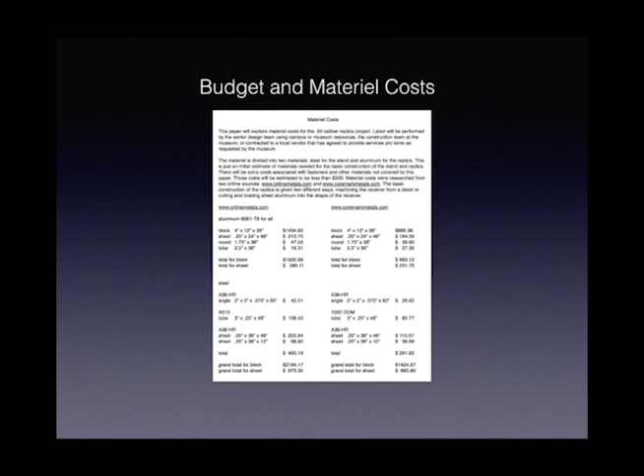After our team decided that the replica will be made from aluminum and the stand from steel, a budget needed to be compiled to allow the museum to develop the funds for materials. Using 2 online sources for aluminum and steel, an initial materials budget was performed and came to approximately $700. The labor for the fabrication will be provided by our team, so no expense is needed for external work.

The plan for this replica is for it to be used by the general public. As such, it is paramount to keep safety in mind for protection against injury. A brainstorming session was conducted to determine hazards and a way to quantify them so as to create mitigation parameters to neutralize those hazards. It was determined that on a scale from 0% to 100%, our design was only rated as 14% hazardous after mitigation.

Hi, I'm Ryan McGinnis. I will be talking about time management and the design process.

To be able to create a workable Gantt chart, the deadlines for major subcategories must be known in advance. These deadlines are chosen ahead of time since they cannot be missed. Working backwards from these hard deadlines, time can be allotted for each part all the way back to the present time. This gives us the ability to give more time for complicated processes by setting soft deadlines. Soft deadlines can be changed as long as the Gantt chart is kept updated to show transparency and the deadlines that cannot be missed.

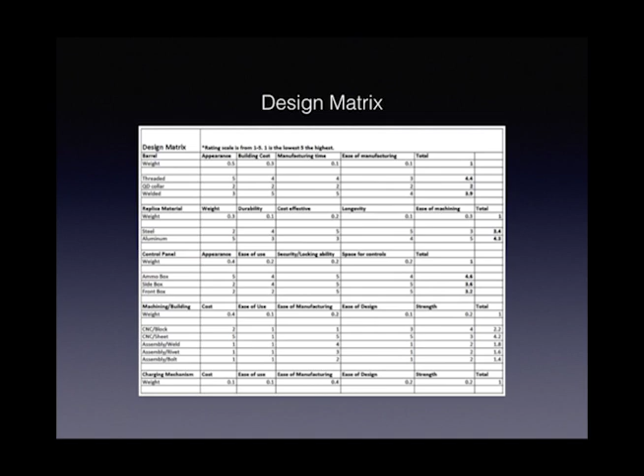One of the most important elements of the engineering process is design. There are many different design processes. One thing they have in common is a team meeting where ideas are presented and they are rated on feasibility of engineering principles. In the end, different ideas with the same ratings are voted on so the team can take ownership of the design and begin to move forward. We chose to use a design process that began with a brainstorming process to identify criteria and solutions. This ended with a vote on each vital area.

The final design for the replica included having the receiver and barrel with shroud made from aluminum and the stand made from steel. The replica would have a removable threaded barrel for maintenance and portability. Fabrication would include welding the upper and lower straps and the front plate to the receiver sides for strength, whereas the back plate will be bolted together for serviceability. The charging handle plate and arm would be machined from aluminum, while the handle axle will be a steel bolt.

The charging hand grip, the trigger grips, and the gun sights will be fabricated using additive manufacturing, commonly known as 3D printing. The stand would be made of steel for strength, durability, and to keep the center of gravity for the assembly as low as possible for safety. Lastly, an ammunition box is attached to the stand to house the controls and speaker.

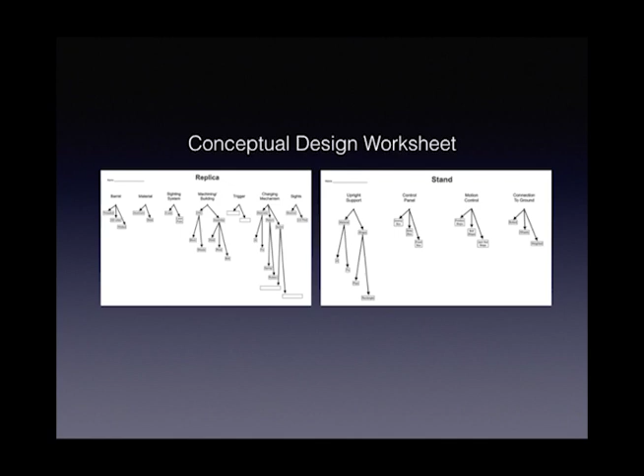I'll be talking about the importance of prototyping and computer-aided design for our project. Based on the design requirements from the museum, our project has the parameter of having the look and feel of an actual Browning M2 machine gun equipped with aircraft sights.

This fixed metric allowed us to be able to take dimensions from sources on the internet and actual measurements from dummy guns at the museum and use them for our replica. The museum allowed us to climb inside the North American B-25 Mitchell to take those measurements.

After creating scale drawings with appropriate dimensions, the next step was to create a prototype from an easily manipulated material such as cardboard. After the cardboard prototype was completed, we took it to the museum to compare it to the other replicas, but it was about 25% too big.

This shows the importance of having testable physical prototypes, even if it was just out of cardboard. Had we not made the prototype, our error may not have been discovered, and we would have produced an oversized final design, which would not be acceptable. Additionally, modeling the prototype allowed us to see where the recoil mechanism would be placed within the receiver.

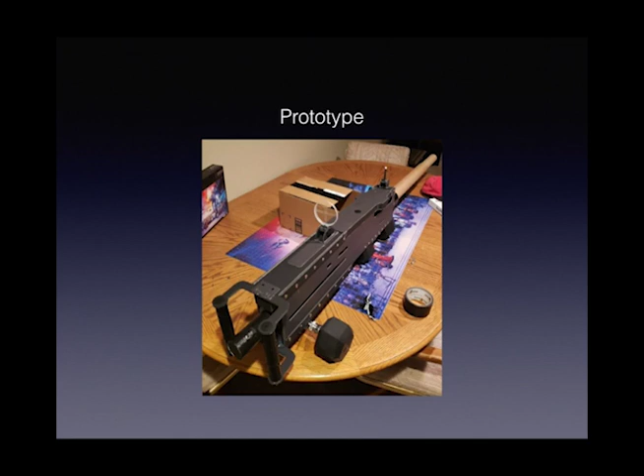One of the museum requirements was for a full set of computer-aided design files. Using SolidWorks, a commercially available design software suite, every part for the final model was created virtually. The final part count ended up being 39 pieces, and they are all together in one assembly.

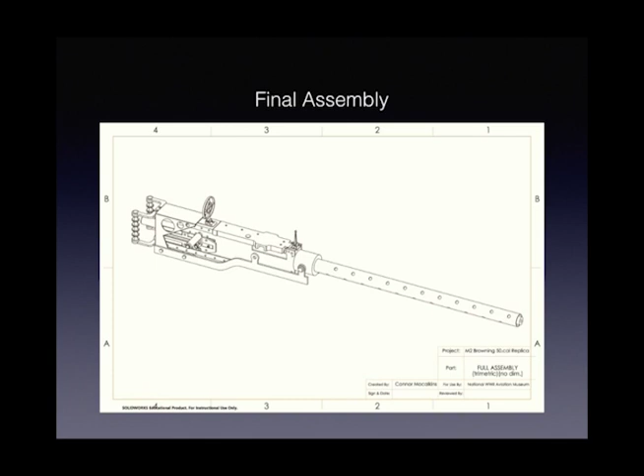During World War II, the Link Trainer was used to train pilots on instrument flight. It did this by using a vacuum to control a rotational and bank and pitch system so that the pilots who were training on this felt like they were flying a real aircraft without actually jeopardizing any real aircraft in the process. During World War II, thousands of these units were made, but the museum is very proud because this unit on the left is actually the only functioning original unit left in the world.

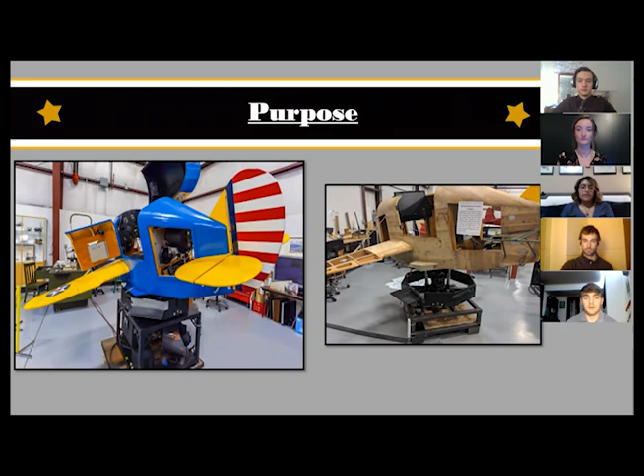Thanks for that introduction, Eric.

Each of the sub-requirements were given a priority. And these priority levels were later incorporated into our decision-making process where we ended up boiling it down to our final design. So looking at our main requirements, the first two that we looked at, the most important, were the rotation and the bank and pitch system. We talked to our sponsor, Vern Patterson, and he gave us a lot of the specifics from the original Link Trainer that we need to incorporate into our modernized project in order to make it as close to the original Link Trainer as possible.

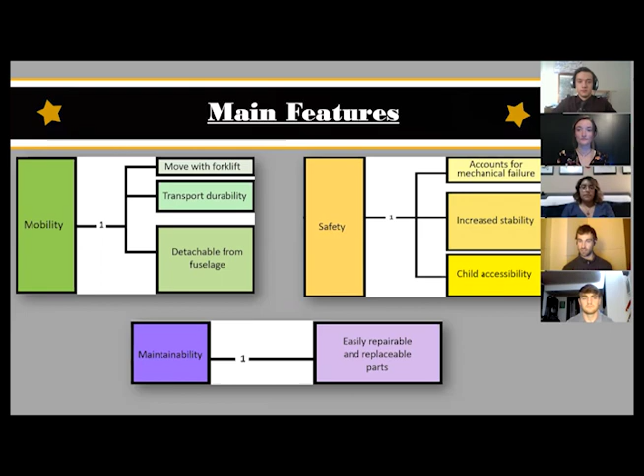Next, on the main requirements, we have the mobility. We wanted to be able to pick it up with a forklift and move it around the museum just to make it easy for them. We also wanted it to detach from the fuselage. And then we also looked at the safety. It was very important that it was a safe piece of machinery because we knew that there'd be kids riding inside the modernized Link Trainer, for that's what the museum wanted to ultimately use it for. And then lastly, we looked at the maintainability. We wanted it to be a piece of equipment that the museum could take apart and disassemble very easily. So moving on to the vacuum system, I'm going to hand it over to Daniel.

Alrighty, so now we're going to dive into more of the description of what we chose as our final design. So from here on out, we're going to be throwing around a lot of things, and we've already done it a little before: pitch, bank, and yaw. So if you're familiar with aircraft, you know what those terms are and what they mean. But just in case you're not, I have a really cool model plane here.

You guys know what it is, bonus points.

Anyhow, so when we talk about pitch, we're talking about moving our plane or the fuselage for the Link Trainer up and down like that. When we talk about roll or bank, we're talking about moving it like that. And yaw or rotation, side to side like that.

All right, so now I'm going to detail the pitch and bank system that we chose. And the system we chose was to emulate the original Link Trainer system. So this is a group of 4 bellows being controlled by a vacuum motor. And the reason we went with this is because the museum is very familiar with this system already. They've restored an original system like this on the 1943 original Link Trainer. So this will make troubleshooting very easy. Further, they already have the capability to manufacture some of these parts like the bellows in-house. So this will make maintenance very easy, very cheap, and very simple as opposed to something like linear actuators.

Where our design differs a little bit is in our use of the valves. So the original system uses mechanically actuated valves, and these work, but they're kind of hard to find these days. And it's also hard to get power to them through a rotating base. So instead, we went with off-the-shelf electronic valves. Our system uses 6 of them. 4 of them are what we call open-close or switch valves. These are very simple valves: you apply power to them, they open, take away power, they close. These are used to control which bellow air is being pulled out of.

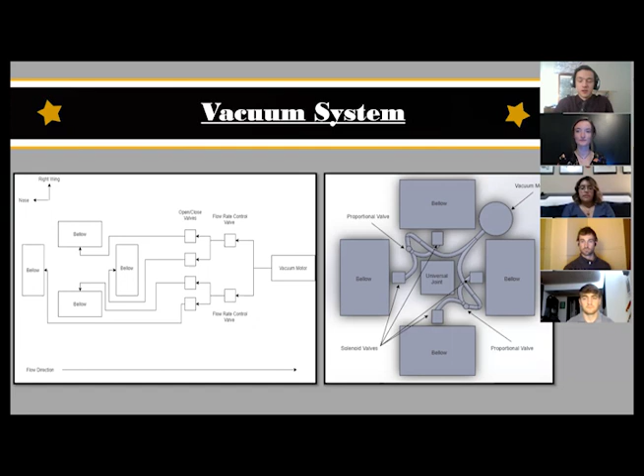The other 2 valves are what we call flow rate control valves. These control the amount of air being pulled out of the system. So this will control the bank or pitch rate, or how fast the fuselage is moving. And so you can see a block diagram of that on the left there. And then on the right, you can see how we shuffle things around to make it all fit in our space requirements. That's the pitch and bank system. Now I'll hand it off to James to talk about the yaw or rotation system.

So to create a modernized Link Trainer that was safe for children to use, we had to develop a rotation system that didn't allow for any vertical or lateral shifts during operation. Essentially, that meant we had to prevent a wobble while the fuselage rotates. So we designed a system consisting of 2 tapered thrust bearings holding a rotating shaft to the system's frame.

As shown by this middle image here, the bearings, which are held in compression, keep the shaft level. The top bearing's inner race is braced against a steel ring that's welded near the top of the shaft. The outer race of the top bearing then slides onto the inner race, and an outer casing is positioned to hold the assembled bearing. 8 support pins are inserted into the casing, 4 on top, 4 on the bottom, as shown in the image on the right here.

The 4 top support pins hold the top bearing's outer race in place. The outer race of the bottom bearing is then placed against the 4 lower support pins. Then the inner race of this bottom bearing is inserted to complete the bottom bearing. A tensioning nut is then placed on the threaded portion of the lower shaft and tightened to keep the bottom bearing in place, thereby holding this whole system together.

Once the system's assembled, the 8 support pins will hold this rotation system to the frame using bolts and brackets. And this pin and bracket and bolt design was chosen because it makes the whole assembly easy to disassemble and reassemble as the museum requires. So on the image shown on the right here, a pulley, shown as the blue circle, is attached to the lower end of the shaft, which connects to the rotation system's motor. Allie will now talk about the motor that will drive this rotation system.

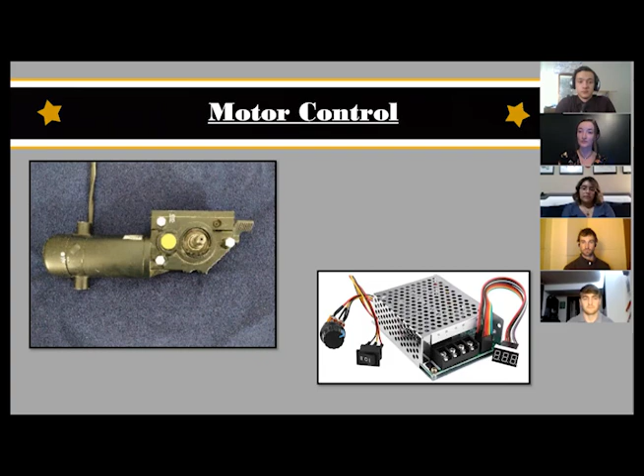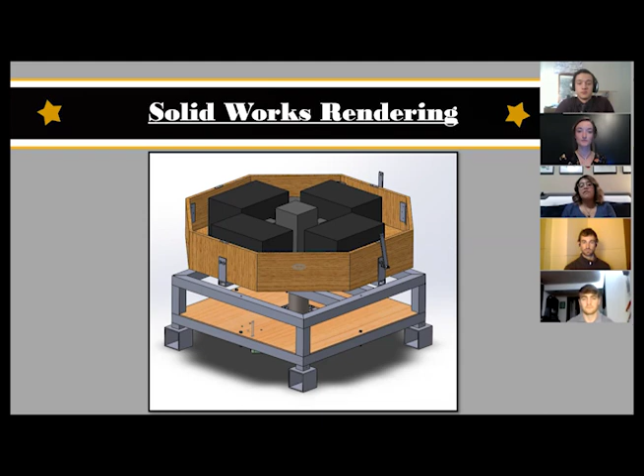All right, so since we weren't able to produce a physical product, we did create the SolidWorks drawing, and this first drawing here on the left-hand side shows the front corner view of our complete base. So as you can see, there's 2 halves of our base, where we have the lower half, which is our steel frame, containing our rotation system, or the system that creates that yaw motion. And then we have the upper base, which contains our bank and pitch system, which is the vacuum system that Daniel talked about earlier.

In this picture here, we can see the upper half of our base, and you can see the top view of our vacuum system. You can see the bellows, the vacuum, the switch valves, and then the flow control valves as well. And we can see the placeholder for the U-joint, which connects directly to the fuselage. Here on the lower half of the base, you can see the bottom view of our rotation or yaw system. You can see the blue pulley that is attached to the lower half of the shaft that's also connected to the motor, which is going to drive our rotation system.

And in this last image here, we wanted to incorporate that capability of mobility. So what we did was we added 4x4 steel stock on the bottom, like little stilts, to be guides for our forklift, so that the museum can move it into different locations of the museum. We did also attach a safety latch up on the top right. And here, this is meant to secure the fuselage when visitors are entering and exiting the fuselage cabin,

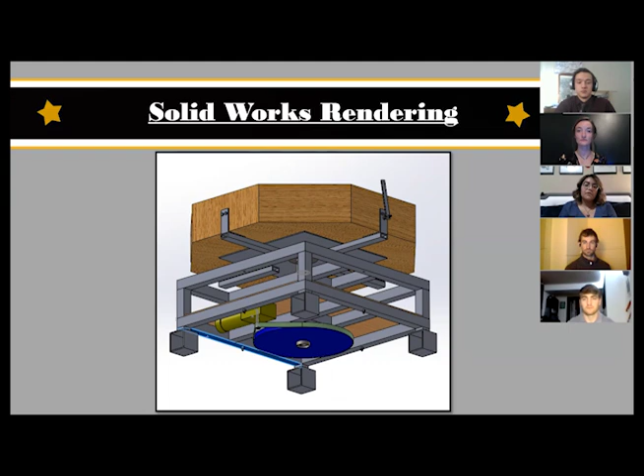and it'll keep it stable. And then we did also incorporate safety catches on top of this, on the wood frame, which, in case the fuselage did drop onto this wooden upper half of the frame, would keep it stable and from tipping over to the left or right side or any other angle, and also reduce the damage to both halves of the equipment so it can be repaired. Overall, this was the final product we were able to create for our sponsor, and it's just a SolidWorks rendering, but this is what we have.